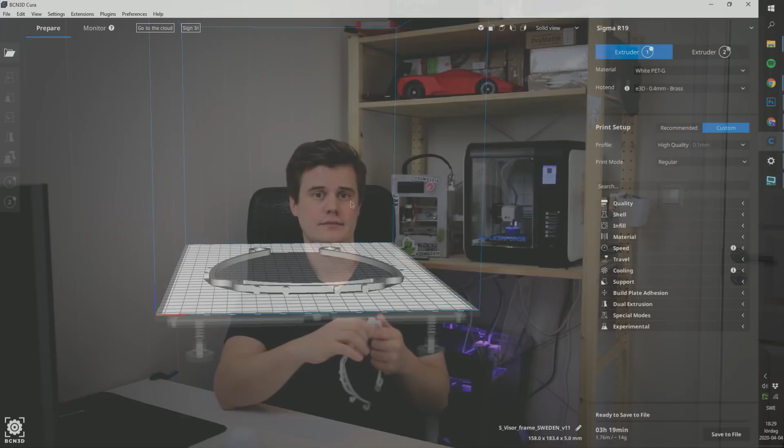We'll be looking at Cura settings through BCN3D's version of Cura 3.2. This is for the BCN Sigma R19 that I'm printing on. But those settings here, they all translate to other slicers as well.

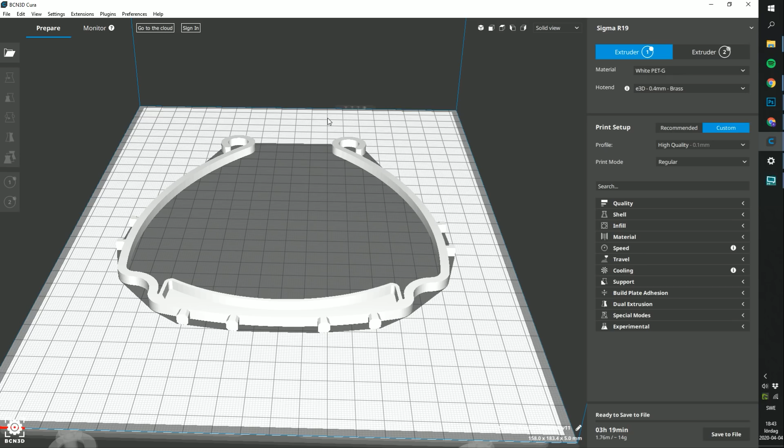Okay, let's start with the more generic ways of speeding up your print. It's some of the very natural ways and really effective. So in this scene I have the frame, it's on the bed here. In Cura here I've chosen the left extruder. I'm also changing the settings for the left one, which is important. Usually you start off with your printing profile at 0.1 millimeters because they want you to have high quality.

So when I've sliced that, that means that we are up to 3 hours and 19 minutes, which is really a lot. So only by taking this to our standard quality, if we prepare this file, we will go from 3 hours, let's say 20 minutes, down to 2 hours and 20 minutes. We already gained an hour just by changing to the standard profile. But we're gonna do much more than that.

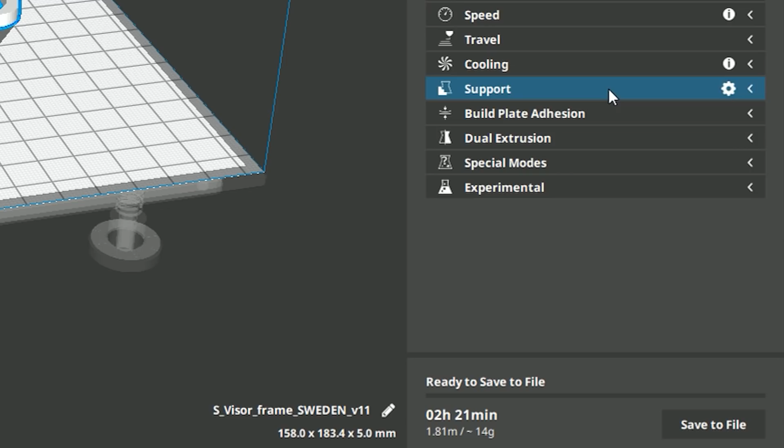So let's start with the first thing that you can do in Cura, is that you can actually check your time specification on the number here. So if we hover over the number, you can see that we're using 4% for infill, 46% of inner walls, outer walls and skin and travel. So this is really important, and basically this is what we're going to change. But it's important to know how this affects your model, and in this case we need to retain a lot of strength, otherwise the model is not usable at all.

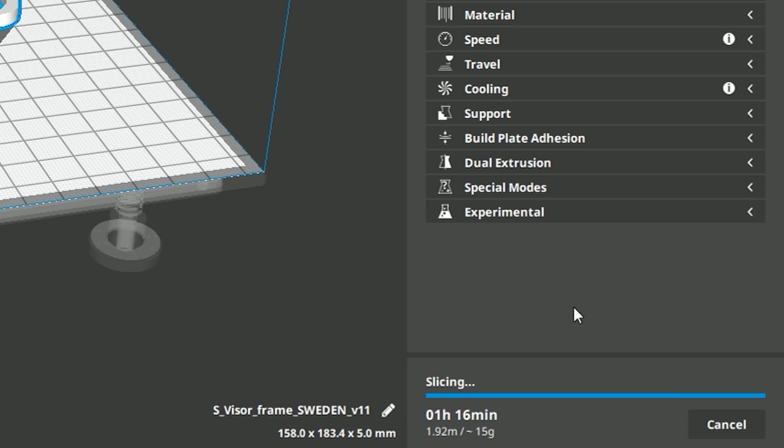So let's start ahead with the first thing that we can do. In this case we can use a lot of changes to the layer height. Basically if we double the layer height to 0.3 millimeters, we should almost divide the print speed by 2. So you see now we're down to 1 hour and 16 minutes only by this change.

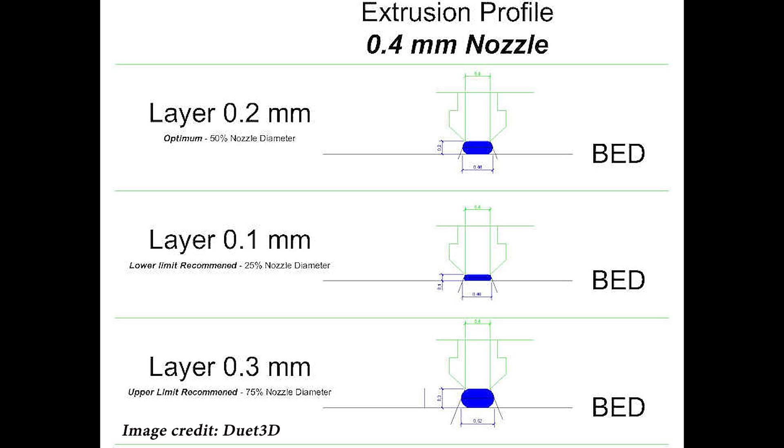Now it's really important to know here that I'm using 0.3 millimeters, which is possible because I have a 0.4 millimeter nozzle. And this is the maximum really for using 0.4. The rule of thumb is that if you have a nozzle size or a nozzle diameter, you can use a layer height that is equal to 3/4 of that. So 0.3 is 3/4 of 0.4.

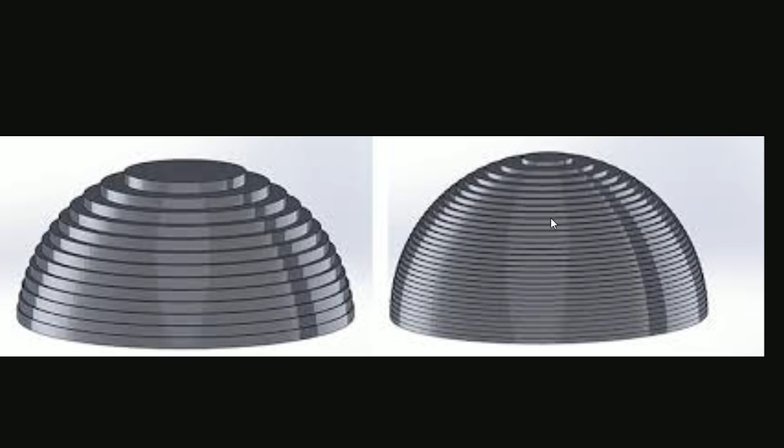Now, if we would have some other model, not this one, because this is very two-dimensional, we basically only have one thickness. If we would have something more like this, or a rounded shape, you can really see how the thicker layers make a much worse model. You get much more stepping in it and it has less details, compared to this one that has more details, it's a much rounder, nicer shape. But again, that's the first thing you should do, increase your layer height. And then we already saved a lot of time.

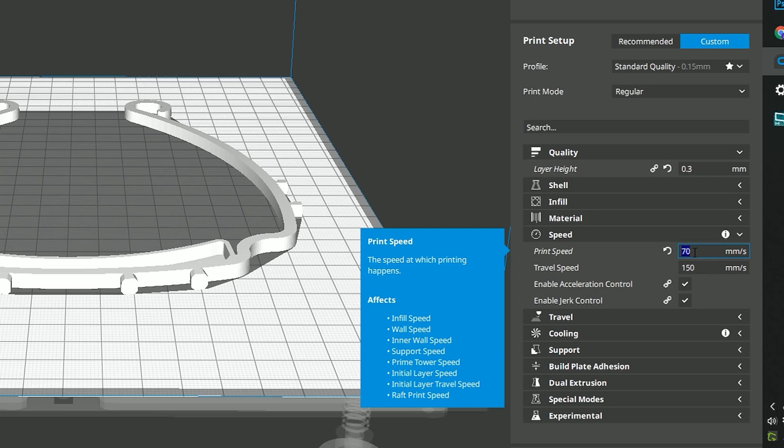So the next quite obvious thing to do is to start changing the speed value. So let's open that menu up. You can see that we have a print speed of 45 millimeters per second. 45 is quite low, but it's possible that we can speed this up to around 70 on my machine. All different 3D printers have different settings here, so make sure that you don't overdo it. A good rule of thumb is that maybe 90 millimeters is max, but let's go ahead with 80 actually. Let's go ahead and slice it. We're looking at a bit faster, but we're still at the 1 hour mark.

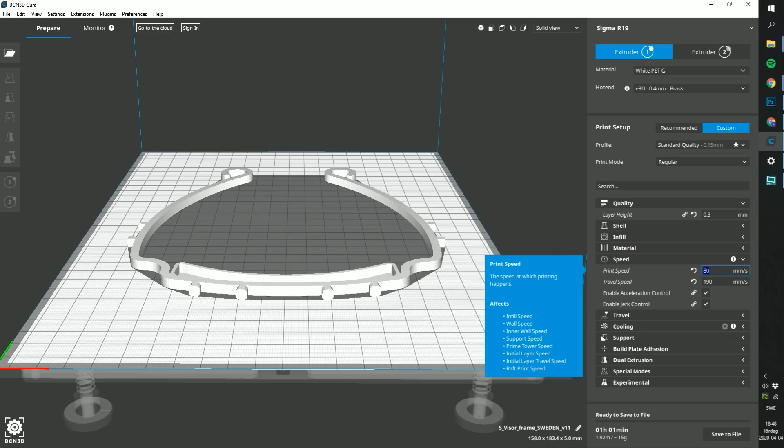Now remember, we're using a 0.4 millimeter nozzle, which means that we are pushing filament out, but not that much filament. When we start to change the nozzle diameter, you will see that we have to lower the speed, otherwise the volume that is melted each second is very much and hard to figure out. So when you increase your speed and nozzle size, you have to balance them together. But 80 millimeters is fine for a 0.4 millimeter nozzle.

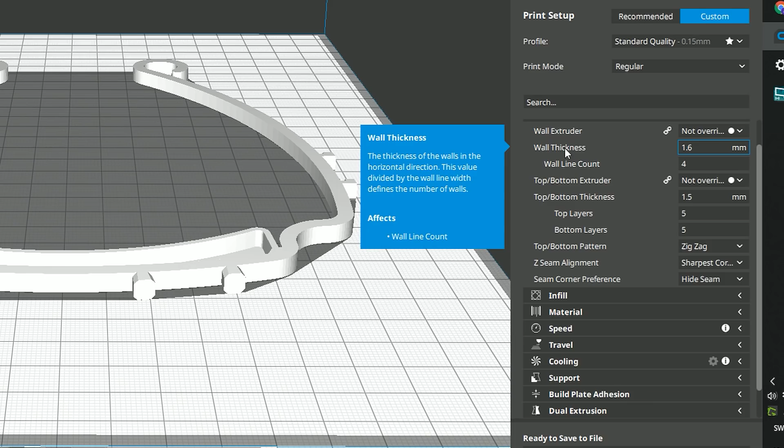Okay, now let's talk about the shells and the infill. So these are the settings that affect the top, the bottom, and what's inside the model, and of course the shells as well. So we'll start with the shells. The standard settings are usually given in wall thickness by millimeters. I like to activate a setting so I can see the wall line count. You can do that in Cura by hovering over the cog. And then in these settings you can either search for wall line count or just tick this box. I usually do the same down here for top layers and bottom layers because I think it's easier to communicate how many layers instead of thicknesses.

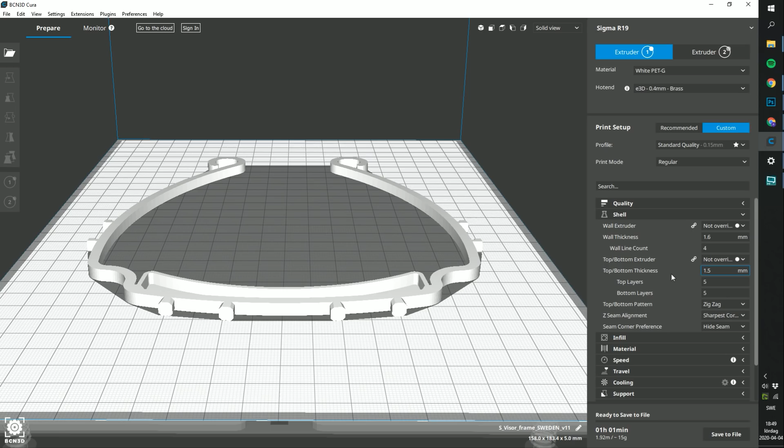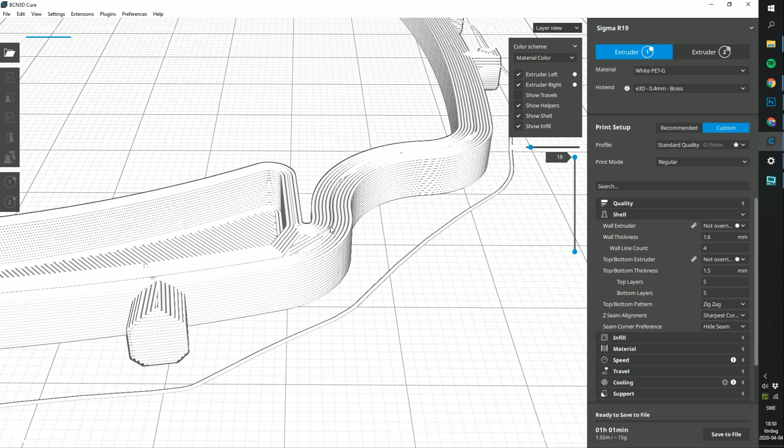So for the line count, if we look at our slice here, by actually looking at layers, these lines here are the shells. And these are really important in this model because you have a lot of strength going into this part of the model. I hope you can see here. This is a really crucial part of this model as well as this part. You don't want delamination, you don't want to have too little strength in this area.

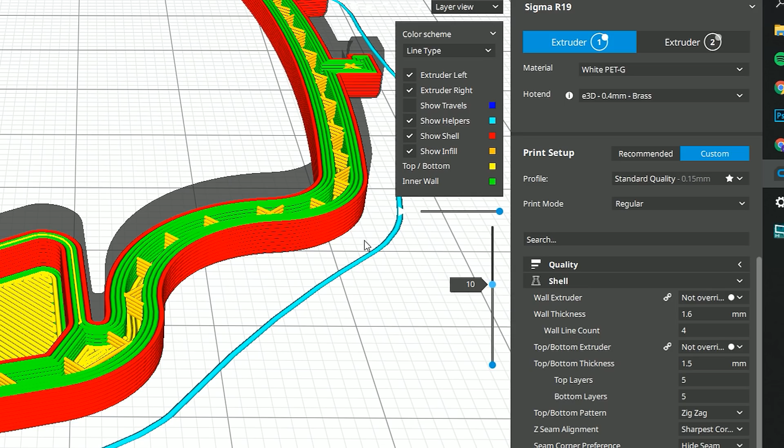We can also look at the line type. So if we look at the red ones, that's the outer shell. And then if I go through here, you can see that these are the inner walls as well. So you have the outer wall, the red one, and the green ones are the extra ones. So when I say 4 walls here, you can see that we have 4 of these walls. We then have the top and the bottom layers, which are, of course, in the bottom. It's the yellow layers here that you can see.

Now reduce the top and bottom layers. Let's go with 2, because it's not really important in this model what the thickness of those is, while the lines are really important because all the loads are in the lines. So I did some changes here. You can see we didn't save a lot of time. So let's go ahead and try to save some time with 1 less layer.

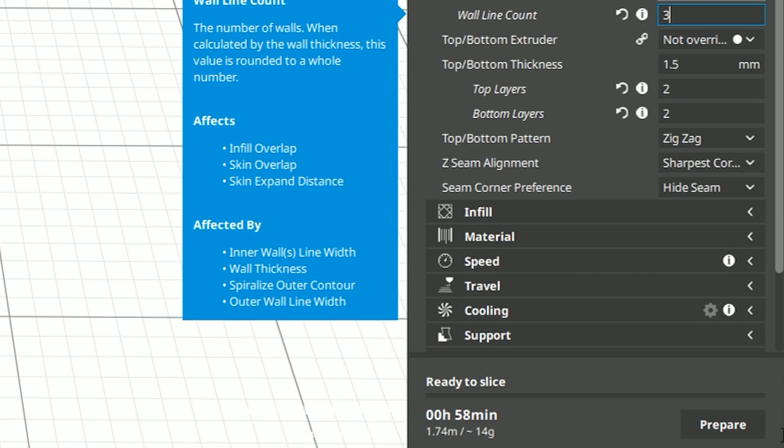But you can see we're starting to hit a cap here. We can't really save a lot more by going down in settings here. Let's go to 1 just to see what that does. I would not recommend printing with 1, but we are gaining a little bit more time. So we're actually reaching our maximum here. Let's go ahead and keep that on 4, but to keep the top and bottom layer.

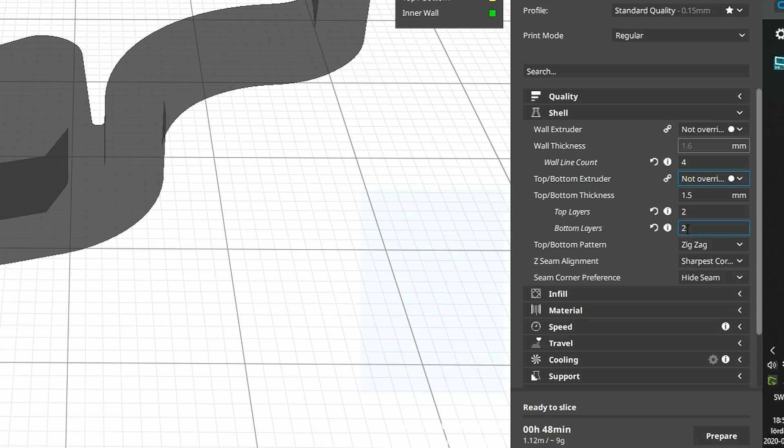Now we can start to move to the infill and decrease that a little bit, because again, the more important strength is in the walls and not the actual infill of the model. So going down to 10% saves us a little bit of time compared to 20. It's not really gaining a lot more time. So we could change some more settings. If you really want to, you can start to do some fine-tuning here. You have the infill speed, the wall speed, outer, inner walls.

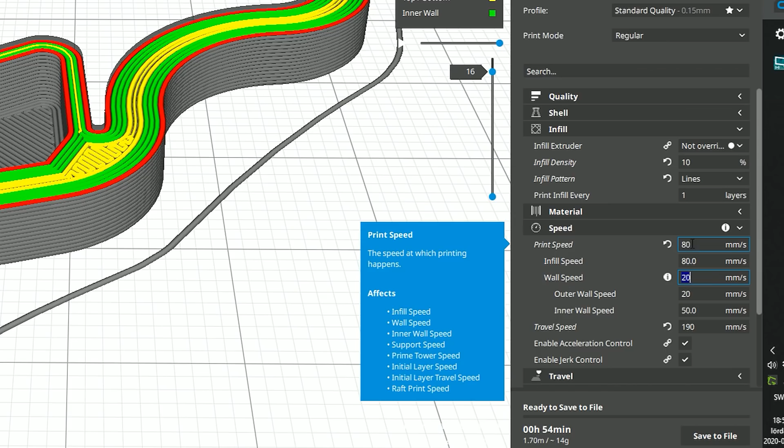So here, for example, we can see that the wall speed is really slow. So even if I change my settings for the print speed, our wall speed is very low. So let's go ahead and double that, which I think should be fine. You won't get the same finish quality, like the really nice finish, but it doesn't matter. We want to optimize for speed. So let's go ahead and slice, and you should see we're starting to gain minutes now. We're starting to creep down into very fast speed.

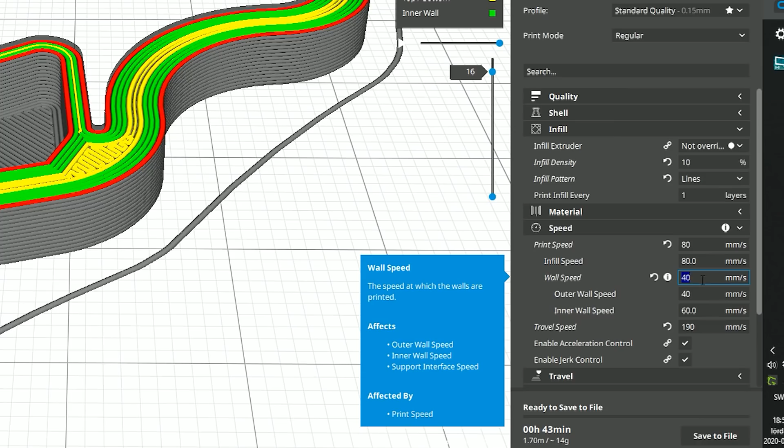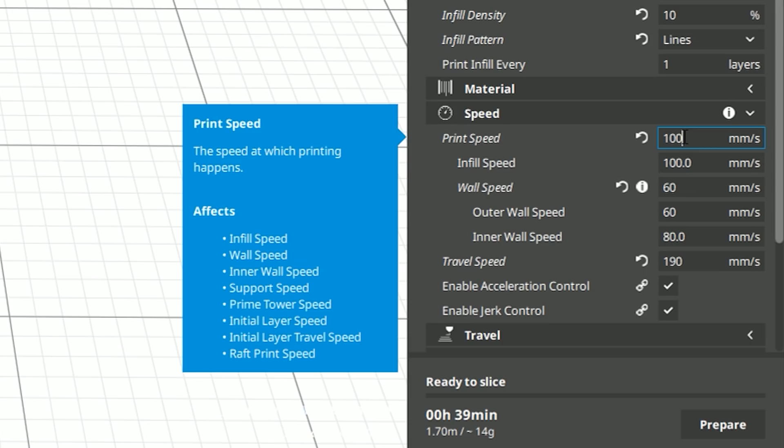Now, we're starting to reach the end of what you can do with the same nozzle size here. So if you want to, you can start to experiment yourself with these settings and try to improve the inner and the wall speeds. So go ahead with 60 and see what that can do. As you can see, we're down to around 40 minutes here. Now let's go ahead and push this up to 100, which I know that a lot of printers can do.

Now one of my printers is ready in the background, but you see I'm optimizing some speeds here, pushing it up to around 35. So the thing is that now we kind of reached the maximum if we're using the same nozzle. I'll be using the 0.8 millimeter just to really show you how fast we can get this done. But what you of course want to do is start to add more models.

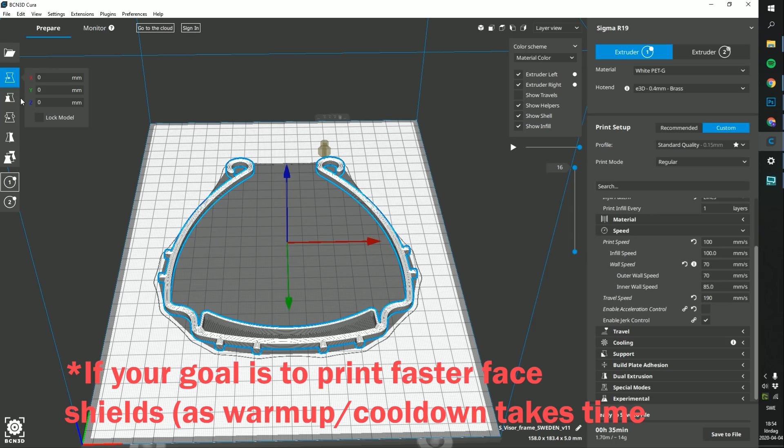So if we move this around, maybe make a copy, multiply it by 1 extra. So it multiplied it, but it kind of moves these around. So if you want to align the models better, you have to go up to the preferences, configure Cura, and ensure that this setting is deactivated: Ensure models are kept apart. We want to do that manually.

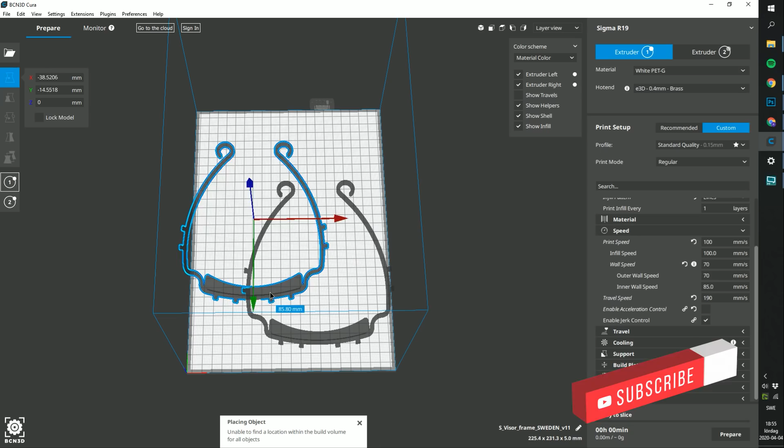So we can take one model, we can take the other one, and we can rotate it. There we go, now we can fit 2 models. So that's one way of also speeding things up. Now again, if you have 2 models, you have more risk. But one of the even better ways, and this is a bit controversial, one of the better ways to also speed things up is to print this one here.

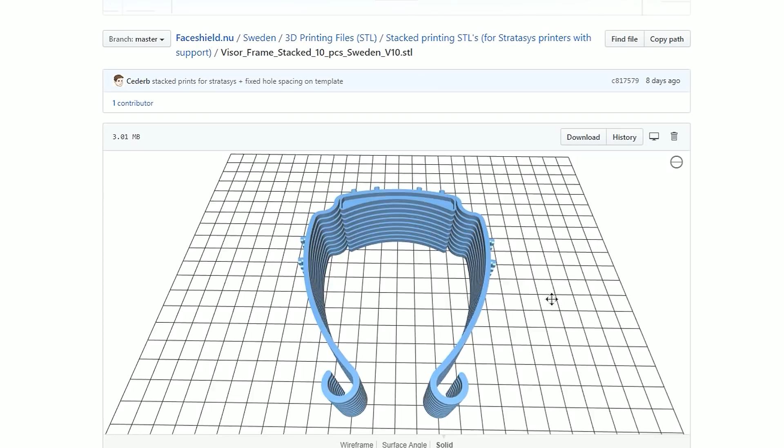They're called the stacked printing STLs. So these ones are 10 stacked, 20 stacked, and 30 stacked. So these models are meant to be printed with dissolvable support, but there are also versions for printers that only have one extruder without dissolvable support material.

Now, it's really important that you talk with your end user, because the finish between those parts might be a bit ugly, a bit rough, and you might have to do some post-processing on that. So really be sure that you can print this with good quality, but those options are there if you want to speed up your 0.4mm nozzle even more.

So as I mentioned before, I went down to 50 minutes with this, and that is basically by switching the nozzle size. So not every printer is able to change the nozzle size, but in this case, this model is designed to work with up to 1mm nozzle size, and in turn layer heights of up to 0.5mm.

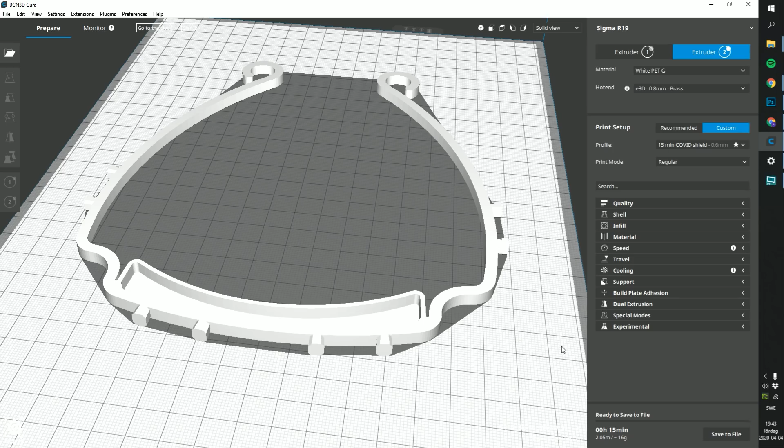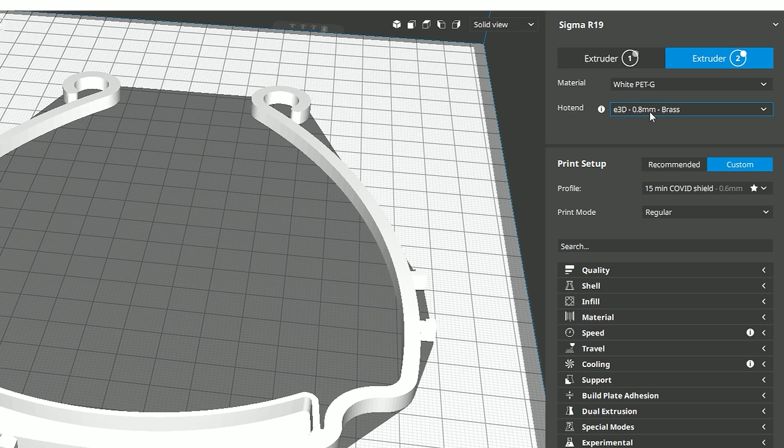So with my machine, I want to show you the settings I've been using. I've been getting down to 15 minutes print time, and that is by basically changing the hot end to a 0.8mm nozzle. Now again, not everyone is going to be able to melt that much plastic at once. So if you're shopping for a new nozzle, I suggest maybe going to both 0.5, 0.6 and 0.8, or even 1mm. So what really does the speed here is being able to put the layer height up to 0.6.

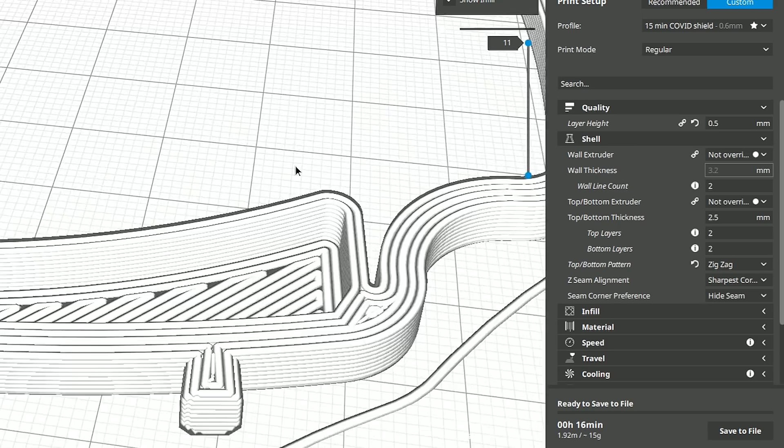That really helps a lot, and that is a little bit too much for some. So even if we go to 0.5, you can see that we, with these settings, are doing 16 minutes, which is totally fine. I'm also using 2 wall line counts, but as you can see, it's still doing a full thick wall here. So this is perfect for the strength of this model. So when you're doing these kind of settings, it's really important that you look at your model and that you check out what's happening with it. I accidentally moved it here, so let's slice it again.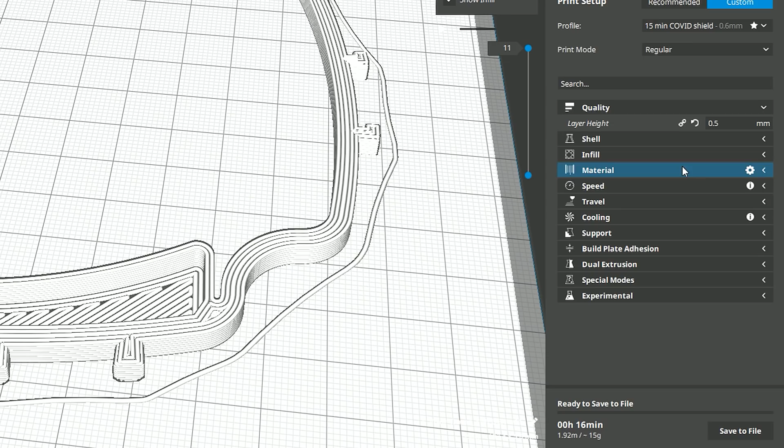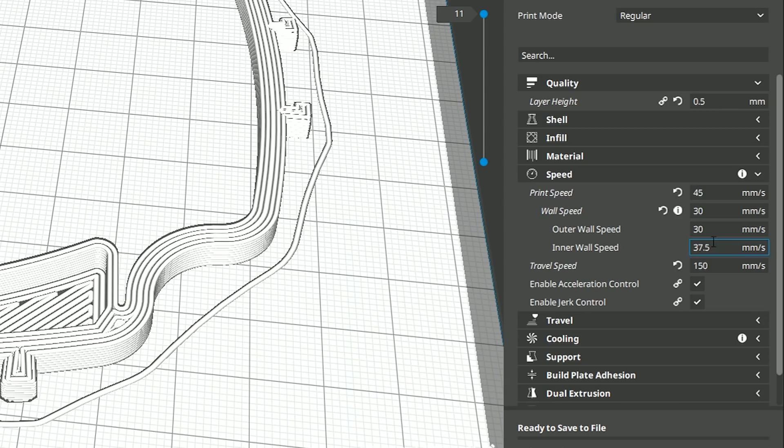I'm also using a little bit hotter than regular. Usually this is 235. That's because I'm pushing so much material out. I want to preheat that material so it melts easier. For speeds, I'm using quite high speeds compared to regular. A stock profile for the 0.8mm nozzle is a print speed of 25mm, and I'm using 45. I'm also changing the wall speed and the outer and inner walls as well, to basically speed things up. But these two, the layer height and the print speed, when you have this big nozzle, that's what's really doing the changes.

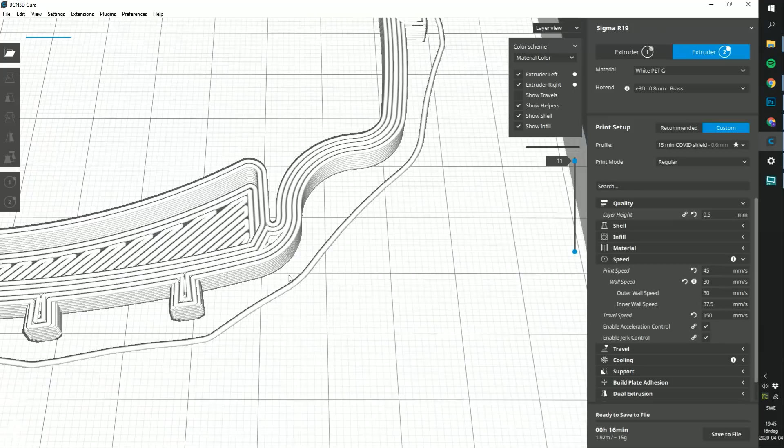Now, I'm not sure that my users are going to accept the 15-minute version, so please be a bit more restrictive, making sure you keep all the quality. But if you do the bend test, which is basically bending the edges out in this model, we still have a superb finish here. You have no reason of breaking the model. It's not going to happen. It's a really strong model with the 0.8mm nozzle. So take care with these settings and adapt them after your needs.

Okay, so that's the basic settings of speeding up a print, or just making sure that you can print more models at once. Now remember, if you're doing experimentation on print speeds, you should always try to change one value and see how it affects your model and make sure that it actually works the way you want. If you just go full bam and change all the settings at once, you're probably gonna achieve some pretty rough and probably a lot of failed models. So a good way is to just do some changes and see what it does to your model. In this case, it took me a while to fine-tune the right settings, and I printed a few versions that did not come out as well as this one.

And also, when we're talking about the face shields, make sure that you know the end user. You can't just start printing and throw them into a bin and send them to a hospital. You have to remember that these are people working like 8 or 10 hours plus every day to make sure that people are healthy. You can't deliver products that are not optimal. So I'm not going to deliver the 15-minute models unless they accept them and think that it works for like one-time use. So you have to think about your environment. For example, if you're printing with pets at home, you should probably not do that, because the personnel using them might be allergic to dogs or cats. So yeah, just make sure that you know the environment you're doing the face shields for.